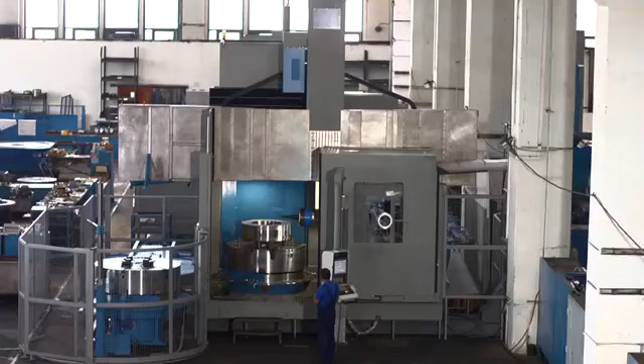TOSHULIN is a traditional Czech company well known for its rich and long experience in the engineering industry. It's a leading manufacturer of top-quality machine tools and vertical lathes in the world.

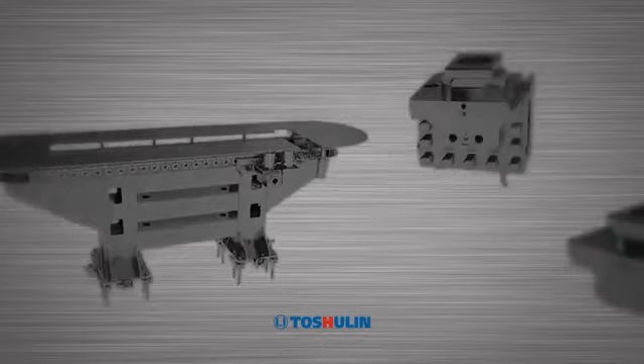Thanks to the variability of our company, our products find application in the most demanding branches of the engineering industry, such as aviation, power generation, transport, mining and petrochemical industry.

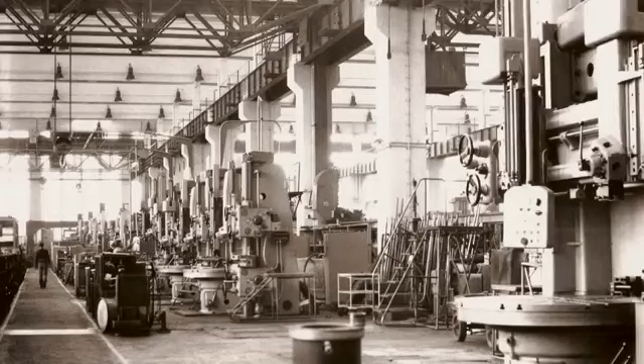The company's rich and long manufacturing experience dates back to 1949. Our know-how is based on a long-term tradition, and it has contributed to the development and manufacture of many innovative machines.

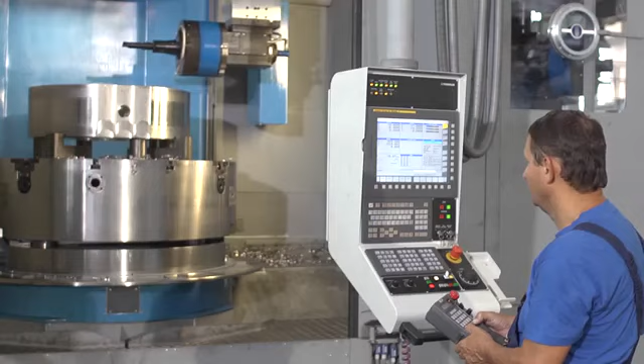However, we don't relax our efforts and keep developing new machinery. Our innovative and tailor-made approach has been of key importance for us up to now, and each customer can always get the required technical and technological solution at the highest quality level.

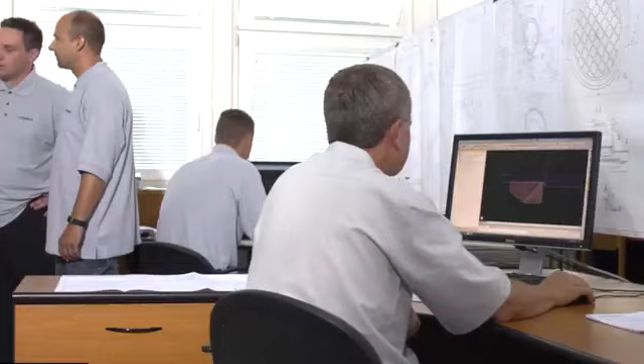Our strong designing team provides constant technological development and application of new findings. As a result, we are able to meet even the most demanding requirements of our customers.

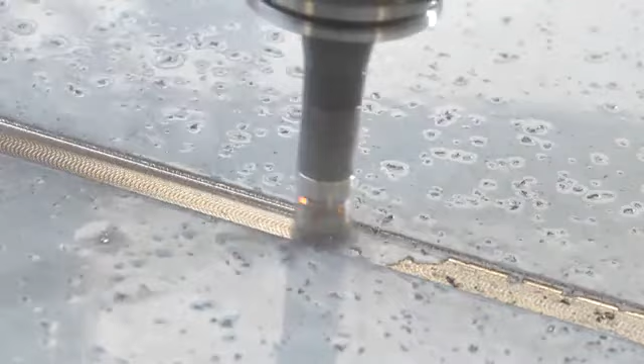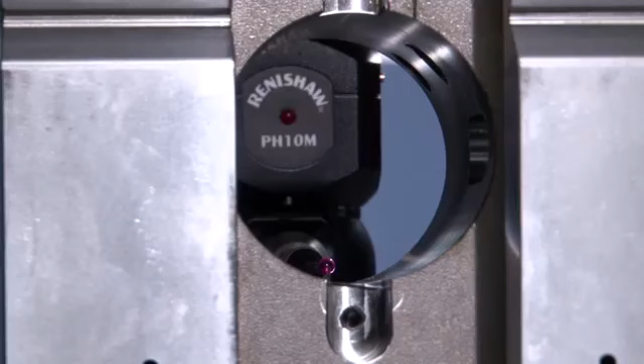We have top manufacturing equipment available, and we apply the latest production processes. Particular parts pass through checks guaranteeing that the final machine will stand the test of subsequent challenging and complex industrial applications.

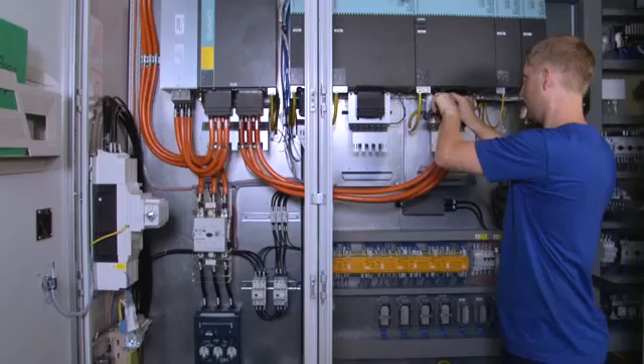Our machinery is equipped with top-quality electronic components which, together with high-precision mechanical parts, guarantee high performance and reliability.

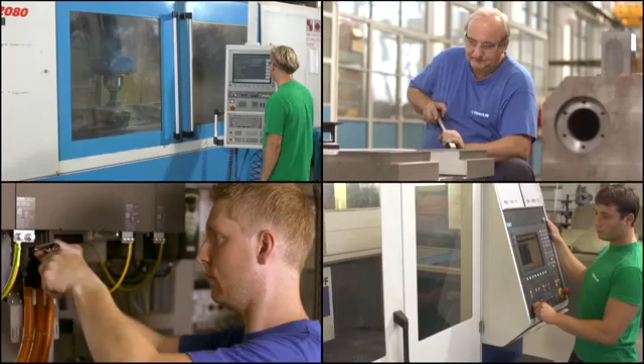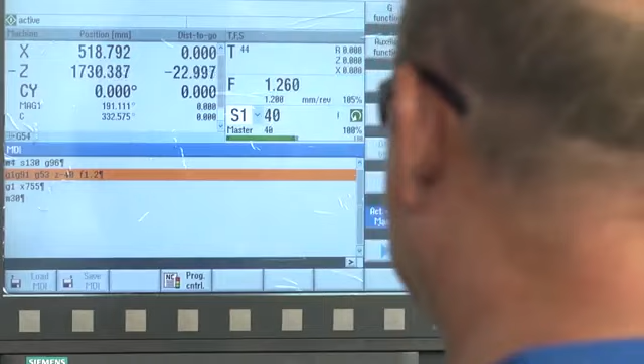High-skilled and experienced staff is involved in all stages of manufacturing and assembly. Each finished machine undergoes exacting measurements and tests. Accuracy, quality and variability are the salient features of our products.

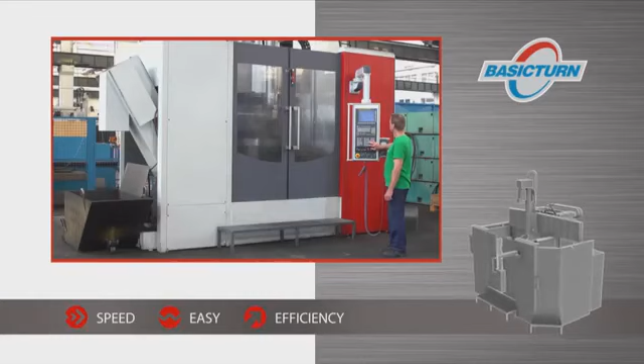Our product model Basic Turn represents a high-quality technological, cost-effective solution for efficient machining of a broad range of workpieces.

The traditional product model Power Turn is specified for demanding technological applications with high accuracy.

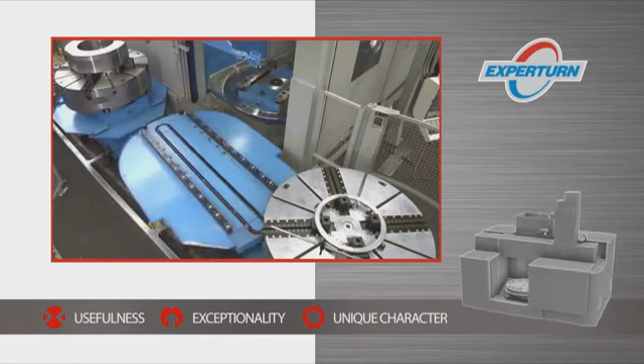Comprehensive machining without compromises. That is our product model Expert Turn, well known for its unique technological solution, tailor-made to suit the customer's specific requirements.

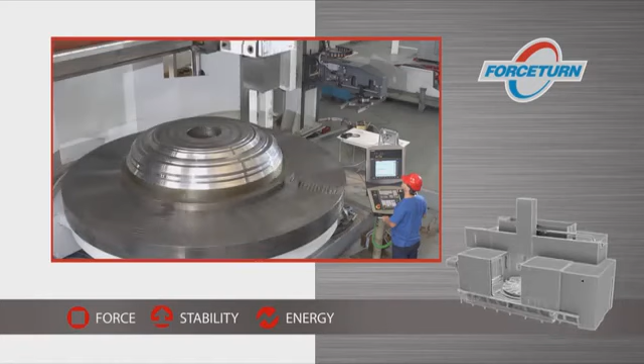The product model Force Turn is primarily designed for high-efficient machining of large workpieces.

We have been carefully and patiently building our trademark on a long-term basis. As a result, our trademark is associated on the world market with quality, technologically demanding solutions, innovations and full-range service.

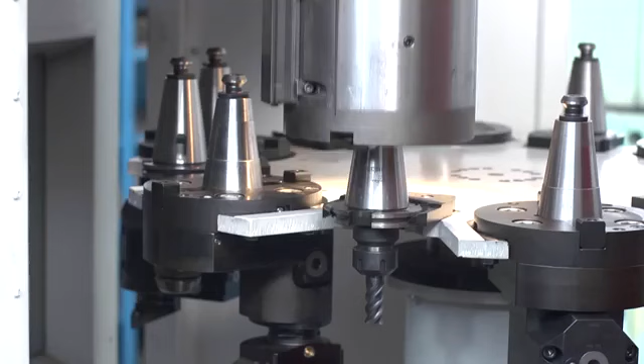We provide warranty and post-warranty servicing, training of operation and maintenance staff, remote diagnostics and other services.

Since the company's establishment, we have delivered more than 13,500 machine tools to more than 60 countries in the world, especially thanks to our well-selected business and manufacturing strategy.

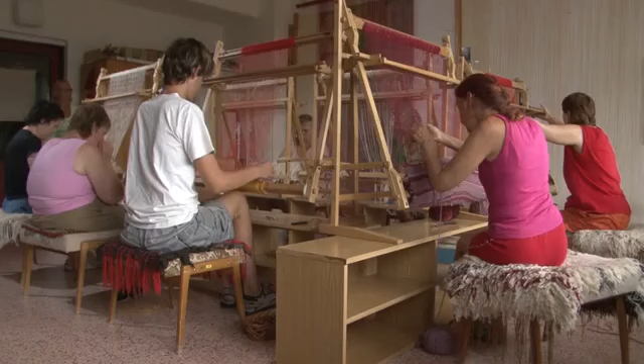A part of our profits goes regularly to charity and sponsorship. In a long-term perspective, the knowledge of helping those who need help is as satisfying as our good economic results.

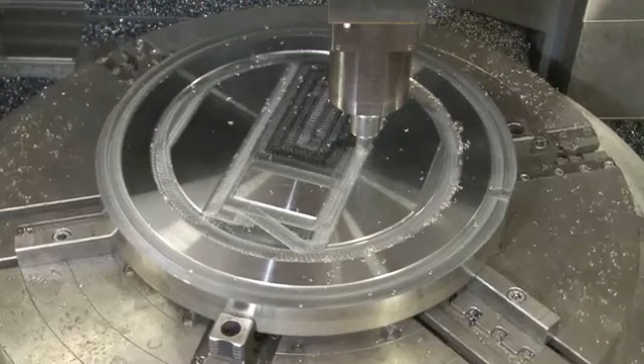Tradition, accuracy, reliability, TOSHULIN.